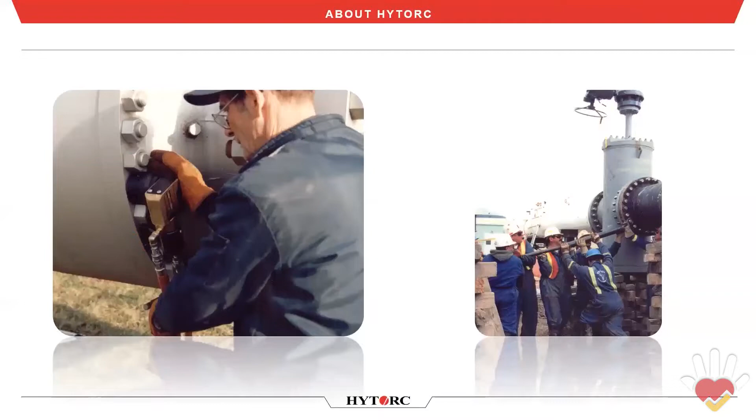On this next slide, we'll see another big problem. There are very large reaction arms, but we also have very large backup wrenches. We have to hold this nut on the back side, and in order to do that, this has to brace against something as well and exert the same amount of force that this front tool is going to exert.

I'm assuming this guy is placing this large wrench on the back here - he's not actually holding it. There's no way he could physically hold it. This arm will move one direction or the other depending on which way we're bolting this tool. It can be a little deceiving which direction this is going to go, and we don't want our fingers there when it goes up and reacts against this next bolt.

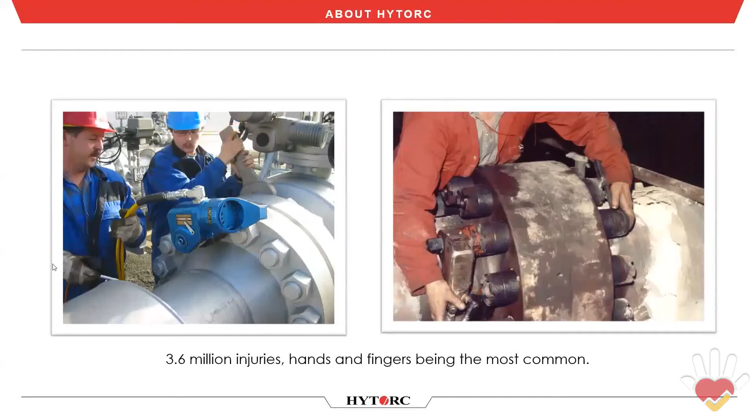So we now have two dangerous pinch points that can cause issues while we're doing precision bolting.

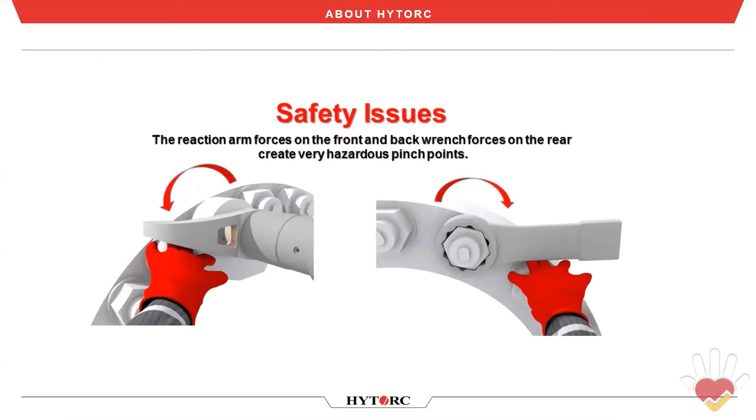So I keep talking about massive amounts of forces. Let's go ahead and look at those forces. This is a good example of the risks that are involved that we solve. We actually have a solution now that eliminates these problems. We will get into that solution in detail in a little bit, but look at some of these ways they're doing it.

So let's look at what type of forces we're talking about. Now we're going to talk about 7,000 foot-pounds because that's kind of a good number. We see it's a good ballpark number for a lot of bolting applications in industry, around that 7,000 foot-pound mark.

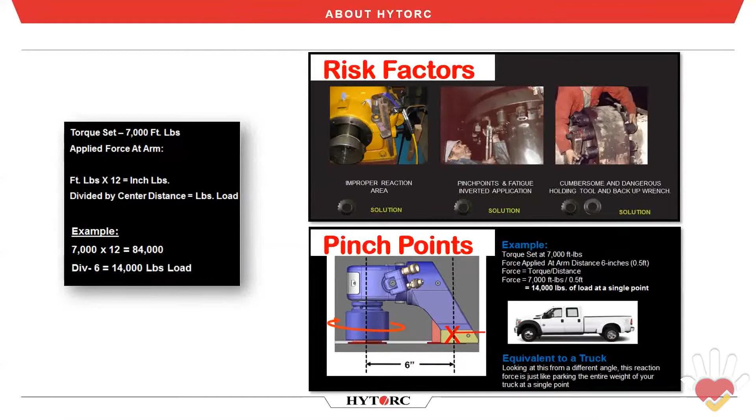27% of work-related injuries are due to getting fingers or hands stuck. But if you look at heavy industry, we're looking at 43% of all injuries occurring to the worker's hands and fingers. So we can see this is not a rare problem. This is a common reoccurrence that we need to solve, and we have done that.

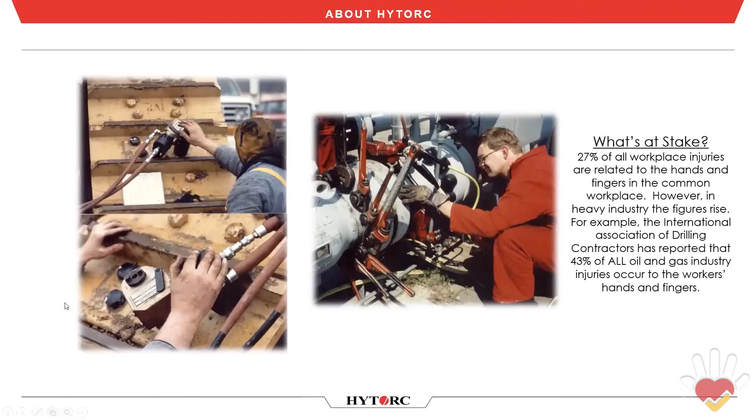So how do we provide value to our partners, to you guys, to our customers around the world? Well, one is job safety enhancements. Two is the job quality enhancements, and the third is job schedule reduction. Again, we're focusing primarily on safety for this webinar. However, with the safety comes these other enhancements.

So what does this mean for you guys? Well, one, zero bolting-related injuries. Now I want to make this clear: we are not minimizing this safety risk. We have a way to fully eliminate that pinch point safety risk. That's a big, big deal. We've engineered out that problem.

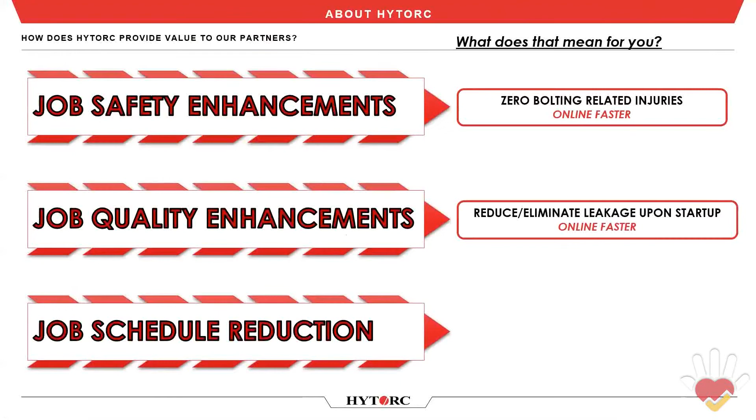All right, so what about the job quality? Well, you're going to reduce and eliminate leaks. We have different optimization methods that we now can do to help reduce and eliminate leaks. We'll get into that in a little bit. And job schedule reduction: you're going to easily cut your bolting time in half using this method. We're not searching for reaction points, we're not dealing with reaction arms. It's a very effective solution for reducing overall job times.

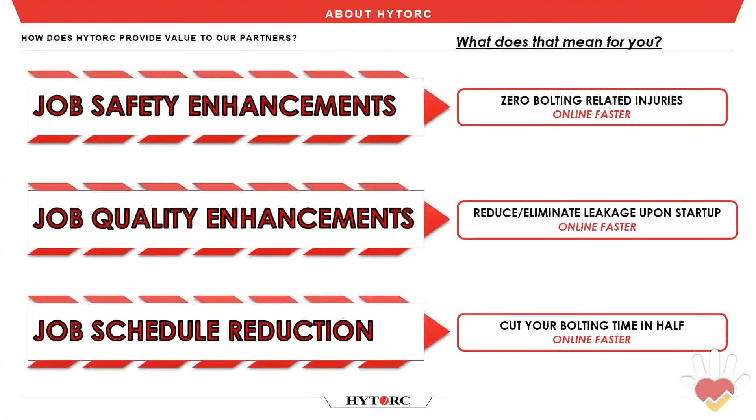So how do we go about achieving that zero bolting injury goal? I said we eliminate, we don't just minimize. We do eliminate those bolting-related injuries. And this is the big one: we're eliminating that hazard. The hazard is those reaction arms. We've eliminated those reaction arms. Again, we'll get into how we do that using a washer in just a little bit.

Hands-free operation. We now have the ability, with a couple of small attachments on a couple of tools, to utilize hands-free bolting, even inverted, so upside down. We can actually have our tools latch onto the fasteners and operate completely hands-free. You don't even need your hands. Even though we've eliminated the pinch points, we now can get our hands completely out of the way of the work.

Manpower reduction. I mentioned earlier it's very dangerous to have somebody working, holding the tool, and somebody else running the pump. Well, now we're hands-free, which means you can place the tools, step away, and run the equipment yourself. If you're in control of that operation, you're much less likely to have a communication error.

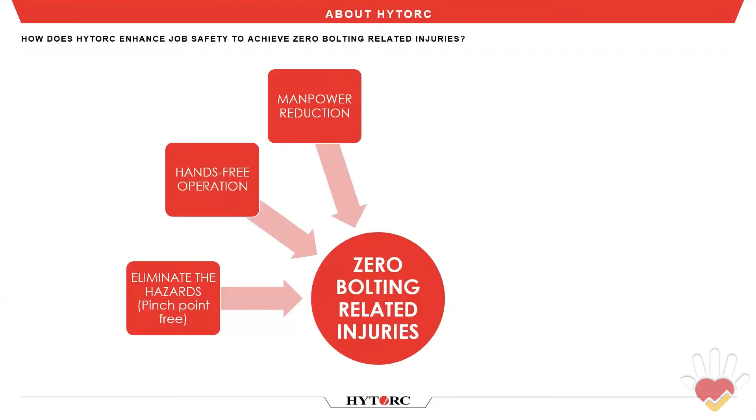Enhanced worker competency. Once learned, the system is extremely intuitive, very easy to use, and we're going to provide the training and the support and guidance for all of your employees so that they understand what they're doing and do the job correctly. And we've got enhanced tooling reliability.

Injuries related to tooling failures, though it's a smaller percentage, it still is in there. Well, we're not side loading, we're not putting that immense amount of load—we talked earlier, 14,000 pounds—through the tool. Instead, we're coaxially reacting, canceling those forces out. Now our tools are more reliable, they'll last longer, and the failures are not as catastrophic because they're not under those bending moments.

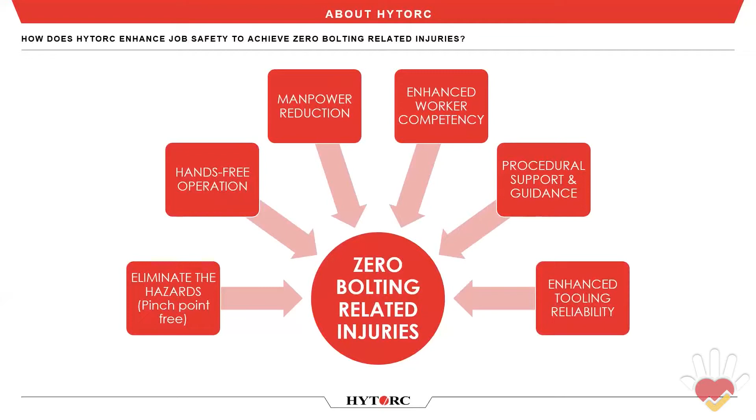So let me go to the second part, the job quality. How do we do that? We do want to touch base very quickly about that. How do we eliminate that leakage, reduce that leakage upon startup?

Well, the first is bolt load scatter reduction, and we achieve that through using a through-hardened washer. As we use a through-hardened washer and multiple tools, we can actually improve the consistency of that bolt load around that flange. That means the gasket's going to be seeing equal crush pressure all the way around the flange.

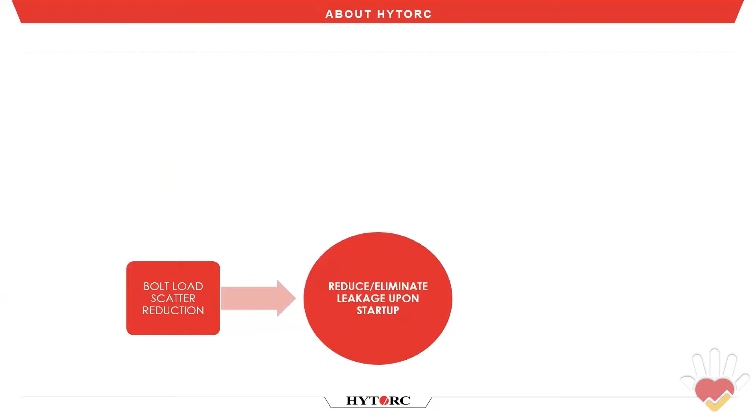Two is joint integrity enhancement. Okay, so this is where we get into our four-tool system. We're hands-free, we can use multiple tools on the flange and pull it together at the same time. I'll show you how that operates in just a little bit.

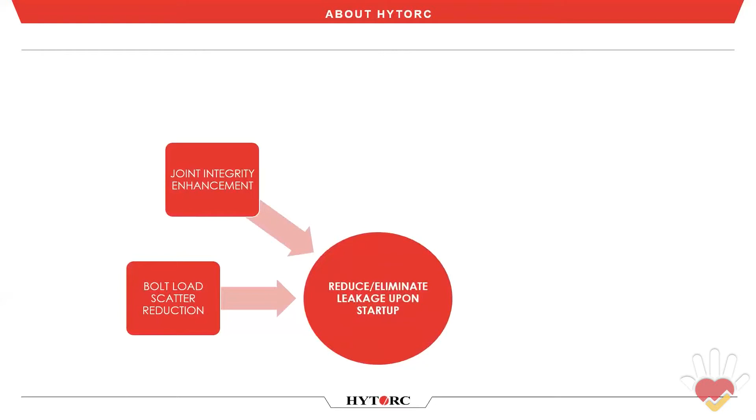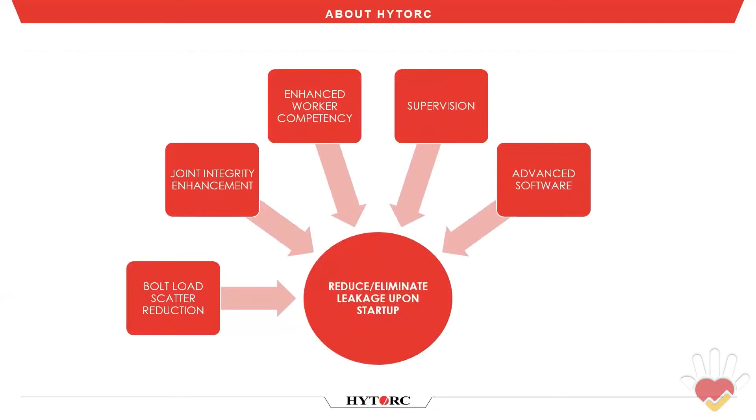Enhanced worker competency—this and supervision go hand in hand with what we just talked about earlier. When your workers are more competent and able to do the job better, they're going to reduce and eliminate leaks. We're also going to provide that supervision, help, knowledge, and expertise from the get-go. We also now offer advanced software that, on especially critical applications, can hone in on exactly what we need to get the bolt load to achieve the best seal for that flange. So yet another weapon in our arsenal to attack this leak problem.

And we're going to give procedural guidance, which ties into that advanced software. We can develop the procedures to vastly reduce the chances of leaking.

Now we're going to talk about the washer. This is how we solve those pinch point related problems. This is the HYTORC hardened washer, an ASTM F436 standard washer. I want to make sure everybody understands this is just a flat washer. There's nothing special about the washer in itself. What's special is it allows our tools to eliminate those pinch points, reduce job time, and improve the quality of the job.

On the left at the bottom, you'll see the reaction washer, and on this side you'll see these knurls. What these knurls do is provide a point for that washer to hold so it's not turning as we're trying to torque. This green washer on top is that reaction washer. Attached to our tool is this driver, and this driver holds the washer while the socket inside turns down the nut. This provides the reaction point, so we no longer need any external reaction point. We're reacting on these lobes on the reaction washer.

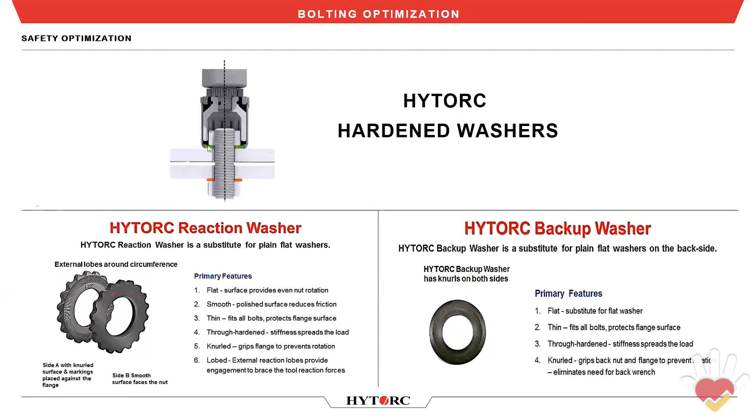This is good reading material. If you want a good classic to read, it's the Guidelines for Pressure Boundary Bolted Flange Joint Assembly, the ASME PCC1 code. I'll leave the plot up to you guys, no reveals for the plot line, but I'm going to show you a bit in here.

One thing is the use of through hardened steel washers. They recommend using a through hardened washer, and this is key, to better improve the translation of torque input. Also, with this washer, you protect the contact surface, protecting that flange surface from being galled up as you're turning the nut under load. It's much easier to replace a cheap washer than to reface a galled up flange. So it's very key that the ASME PCC1 guidelines actually recommend using a through hardened washer, which our washer is.

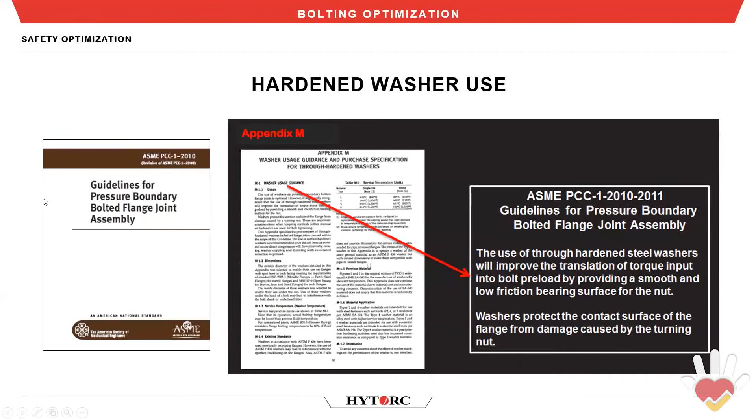We're also using 4 tools, and what 4 tools allows us to do is parallel close that flange together and evenly crush the gasket. We're not pinching the gasket as we rock the flange together. This greatly improves the flange integrity, the joint integrity we talked about earlier. We can vastly reduce leaking problems by using this method with our HYTORC washer and our hands-free bolting system.